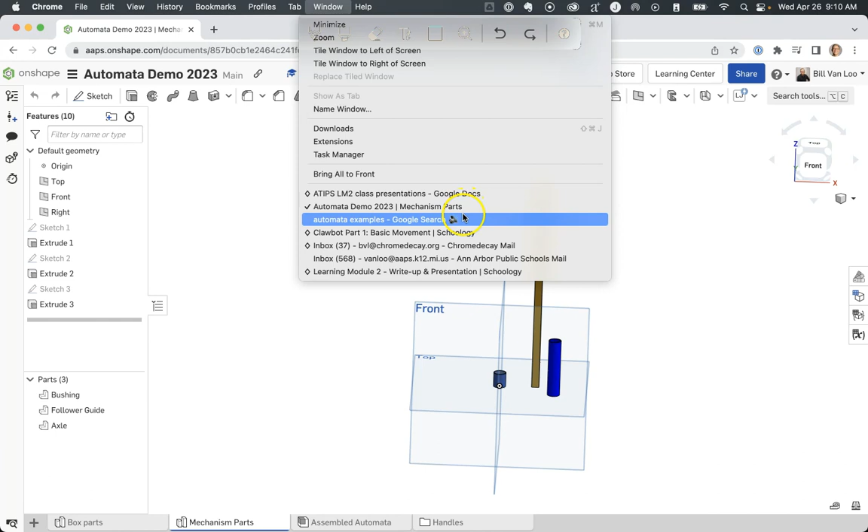So far we have our box parts and we have our mechanism parts. There are a few more files that we need to actually go in and model, so let me show you what those look like. The additional drawing files are in the mechanism parts drawing files folder. Up until now we'd had just these first four, now we're adding an additional part called follower with point edge, and eccentric cam.

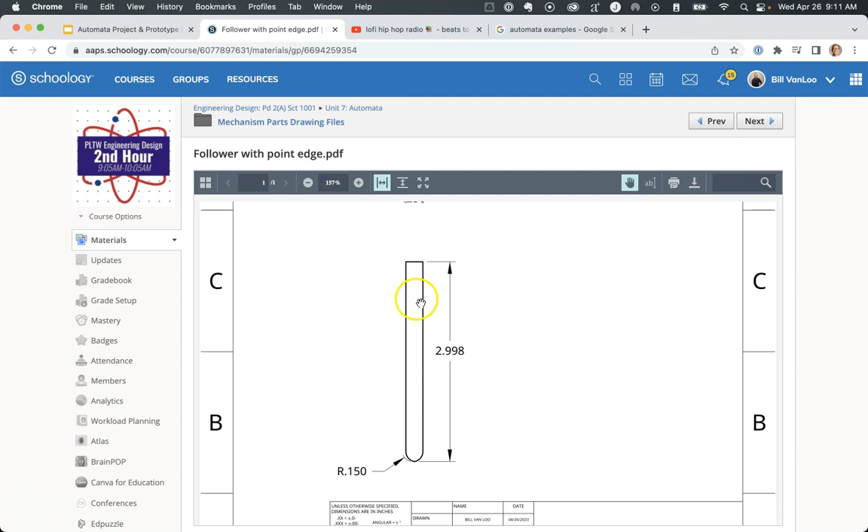Let's start with the follower with point edge. The drawing file for this shows that this is basically very similar to the axle. It is a 0.25 by 0.25 square prism. The important difference here is that this has a radius applied to one end, and the reason that's important is that we're going to need that radius for the follower to smoothly be able to ride along on the cam.

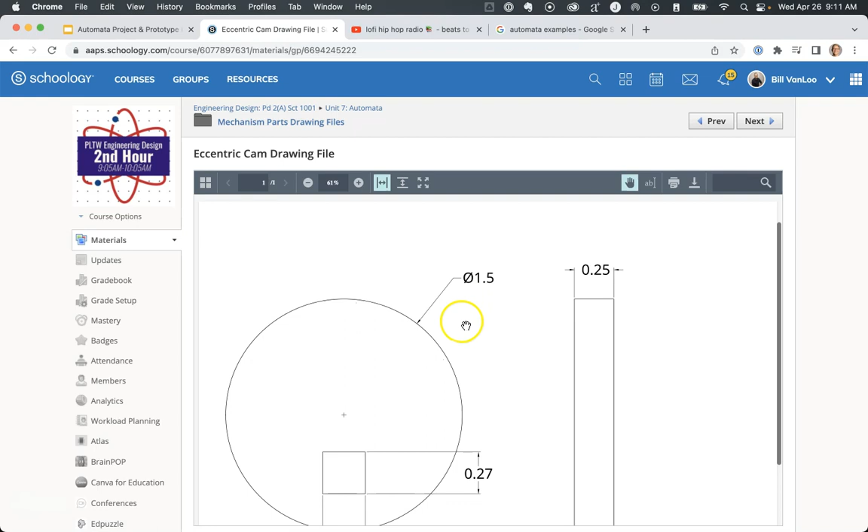So let's talk about the cam and what it looks like. There are lots of different kinds of cams. For this prototype, we're going to just use this one type called an eccentric cam, which basically means it has an off-center hole. So it's just a circle, this one is of diameter 1.5 inches, and it has a 0.27 by 0.27 square hole. There's a little tolerance there so it can slide onto the square axle pretty easily. And you can see that it's just 0.25 inches in depth.

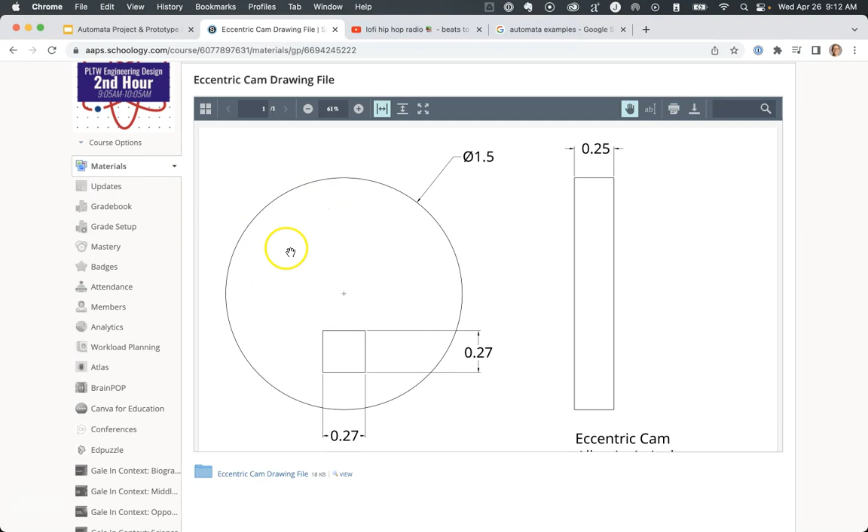So the first thing you'll need to do is model those two parts. You'll need to model the follower with point edge, and you'll need to model the eccentric cam. Once you have those things modeled, then we need to go through and actually start assembling things.

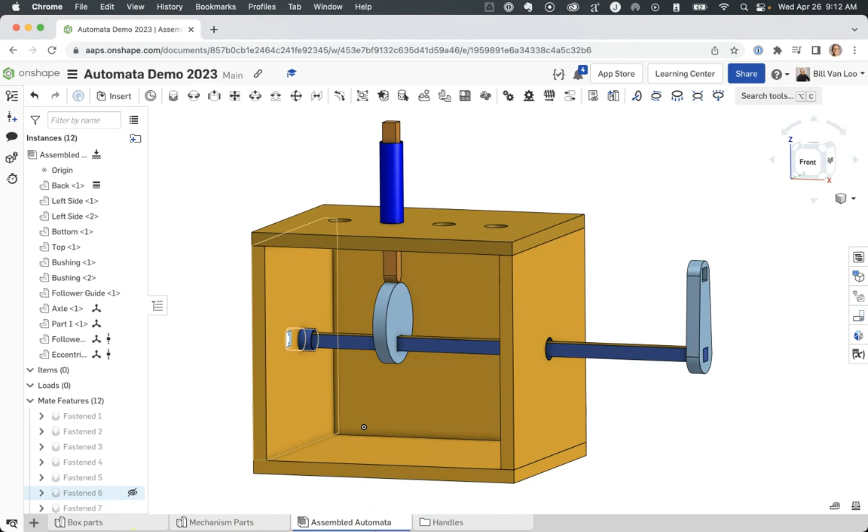I showed you an example of what the finished assembly looks like. What I want to do now is take a minute to just build that up for you so you can see what that looks like. So what I'm going to do is pause the video and get this to a good starting point. What I have at this point is just the automata prototype's enclosure, just the box in other words.

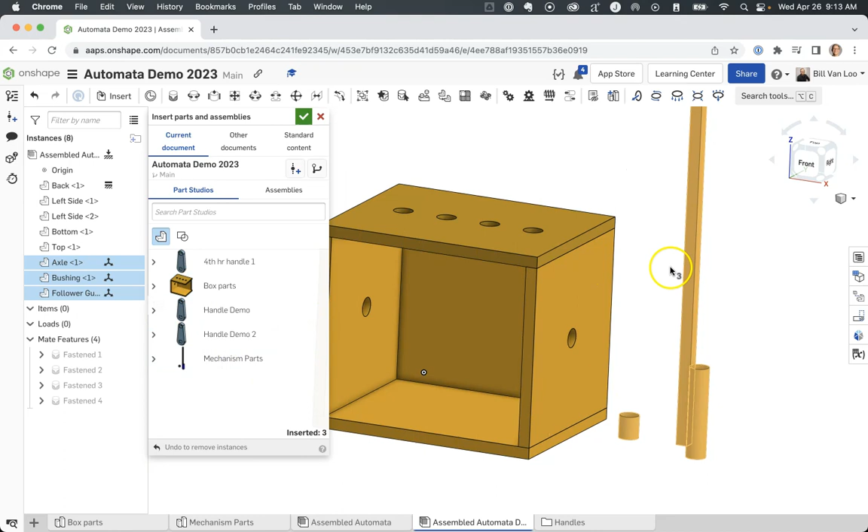What I need to do is insert those additional parts and then start putting in the correct mate types that go along with those. So I'm going to click Insert. Now in mine, I chose to model the mechanism parts in a separate file, or a separate part studio, so I'm going to click and just insert all three of those things.

I've got my axle, I've got my follower guide, and I've got one bushing. I'm going to need two bushings, which are those little sections of straw that we use in real life. So I'm going to go back to Insert, go back to my mechanism parts, and insert a second bushing, and click OK.

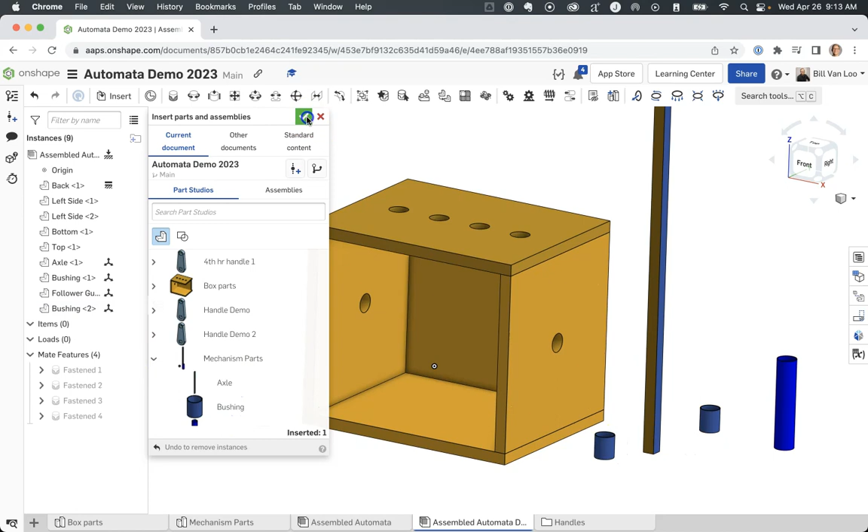I did go through and change the appearance for these things to make the follower guide and the bushings a little easier to see. You don't have to do that, but I think it's kind of a nice touch.

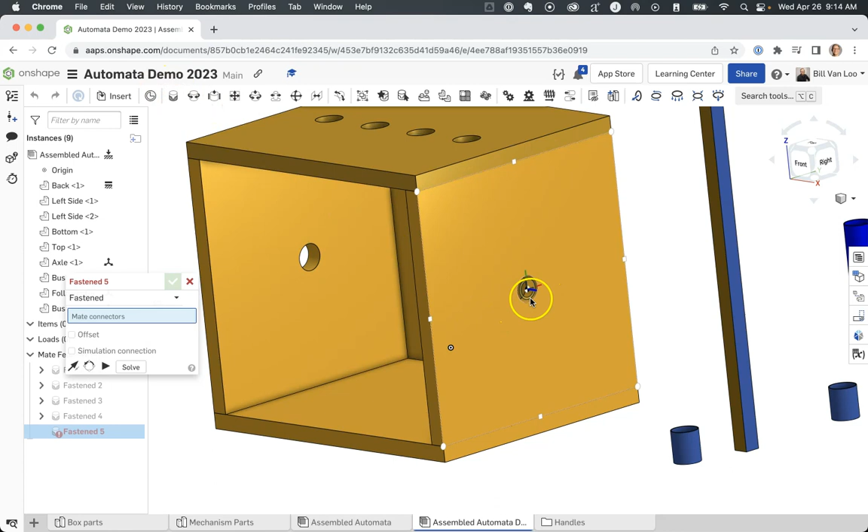So the first thing I need to do is actually assemble the bushing into that circular hole. For that, I'm just going to use a fasten mate. I'm going to find the mate connector for that hole, then orbit around and find the mate connector for that bushing. You can choose whether you want the bushing to be sticking into the enclosure so it's nice and flush at the end, or you could choose to have it offset some. I'm just going to go ahead and click OK, and so now my bushing is set in there.

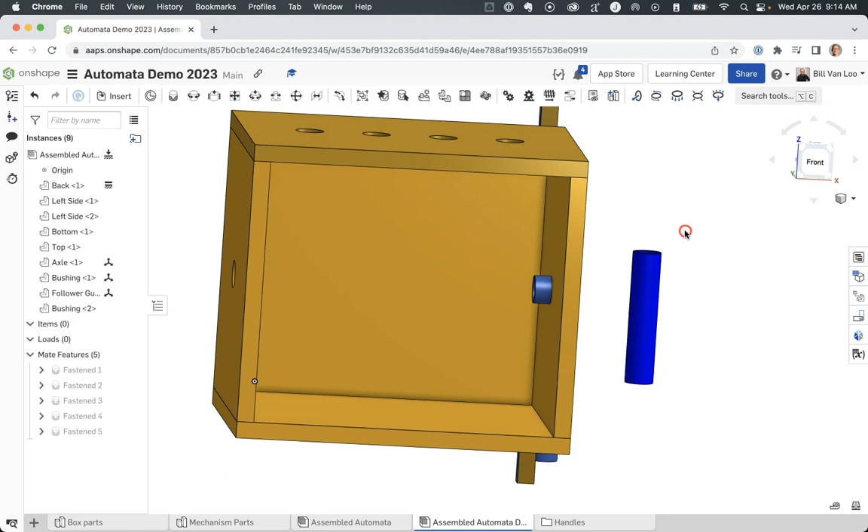I'm going to do the same thing over here. So I'm going to go and find the center mate connector of this, find the center mate connector of this, and let that get assembled there. So that all looks good. That's great to start with.

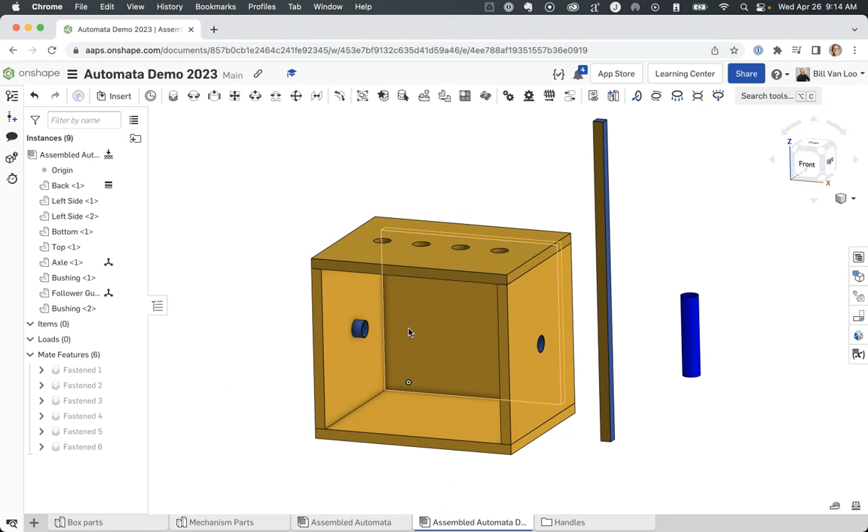The next thing I'm going to do, you could do this in a few different orders, is I'd like this axle to go through the bushing and be able to rotate or spin freely. In Onshape we can use a revolute mate for this. I'm going to choose the mate connector at the end of this axle, and the mate connector for that bushing, and click the check. It's a little hard to grab, but you can see if I grab and rotate the axle, it spins inside there.

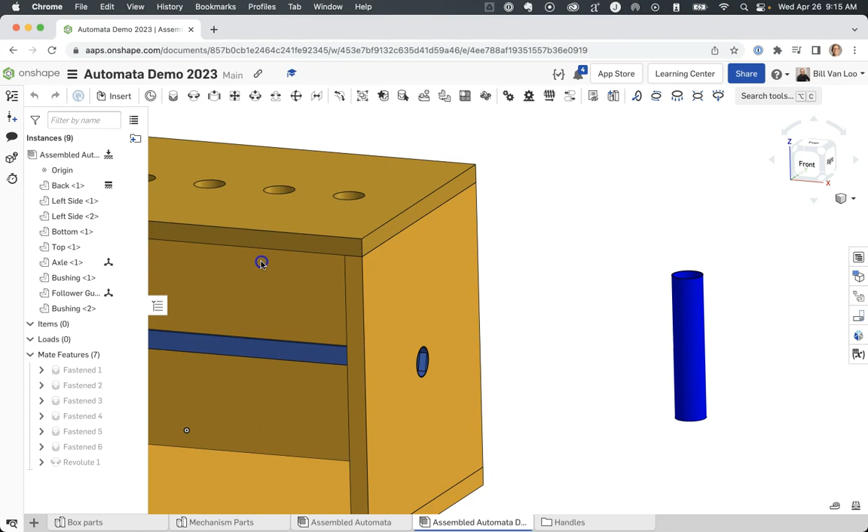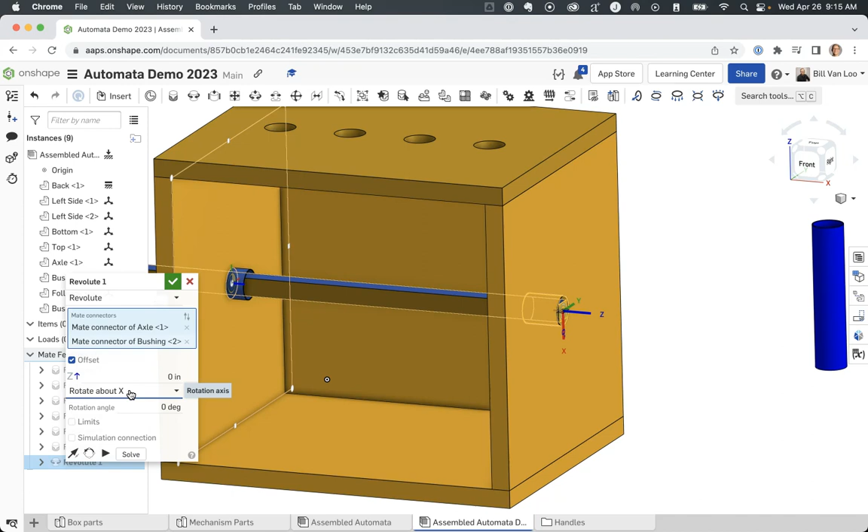One thing that's a bit of a pain with Onshape is that if I were to edit that revolute joint, I can't slide this thing over using offsets because the only choices for that type of mate connector are rotate. I don't have the ability to move it over and translate it sideways. So instead of mating it to this one, I'd like the crank handle to be on this side. Let me get rid of that revolute.

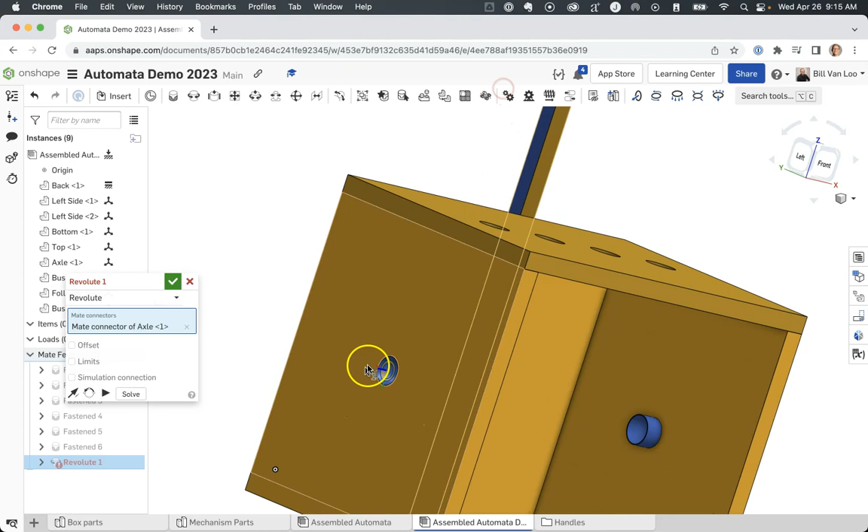I think I'm going to choose the other side bushing instead so that it ends up right here. Let's flip that around so it goes the other way. Now I've got this long axle sticking through there, and that all looks good.

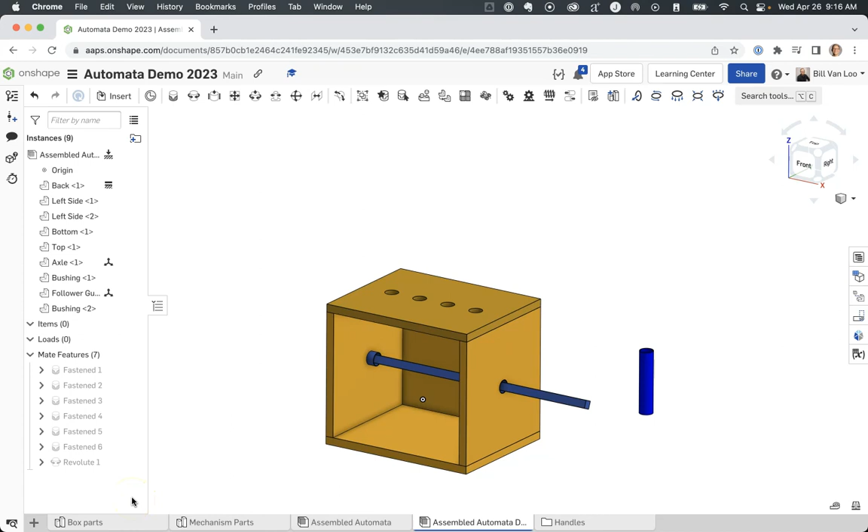Next, I'm going to go ahead and insert the cam that I've modeled elsewhere, along with the follower with follower guide.

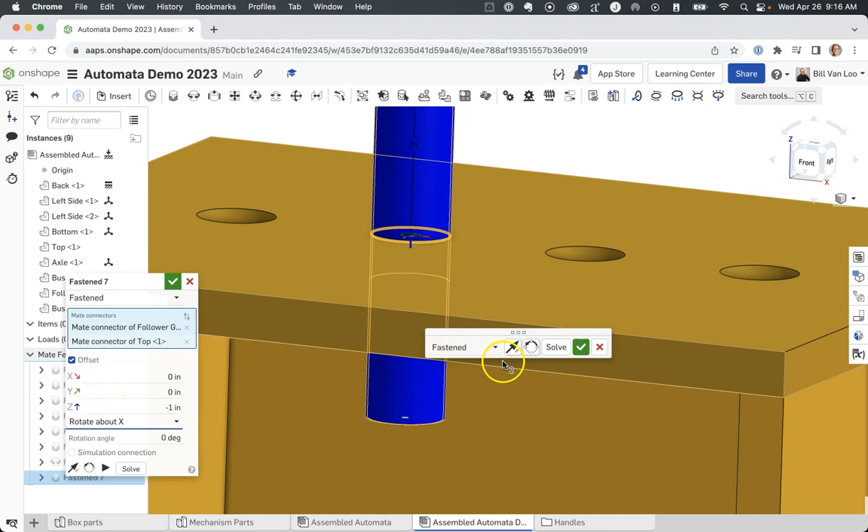Before I do that, I need to put in my follower guide. Same kind of thing: I'll grab the mate connector here, and choose this mate connector here. Because this is a fasten mate, I can choose to offset this some. It looks like I need to offset that in the Z direction by about -1 inch or so, so it's sticking halfway through there.

That looks good. Now I need to go through and insert those additional parts that I've made. I modeled those in a different part studio, but I can still insert them. If you chose to model those in a different document or part studio, you can still definitely go through and get those. One thing I need is the handle.

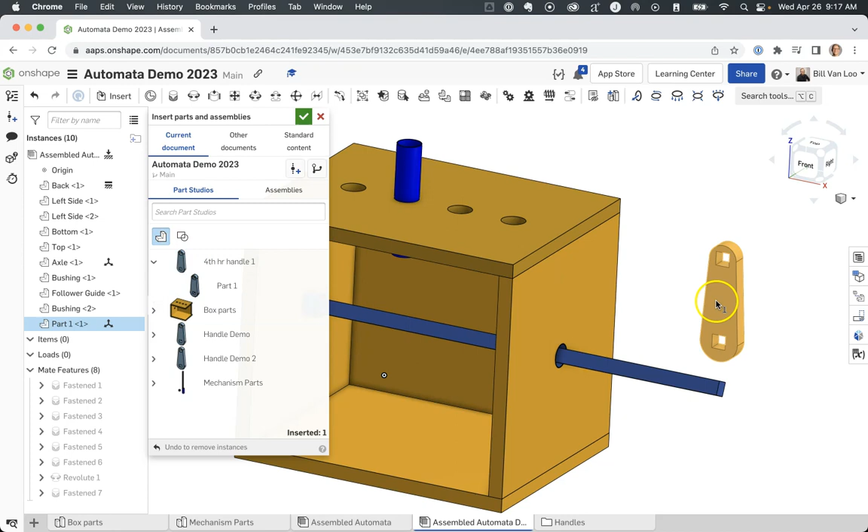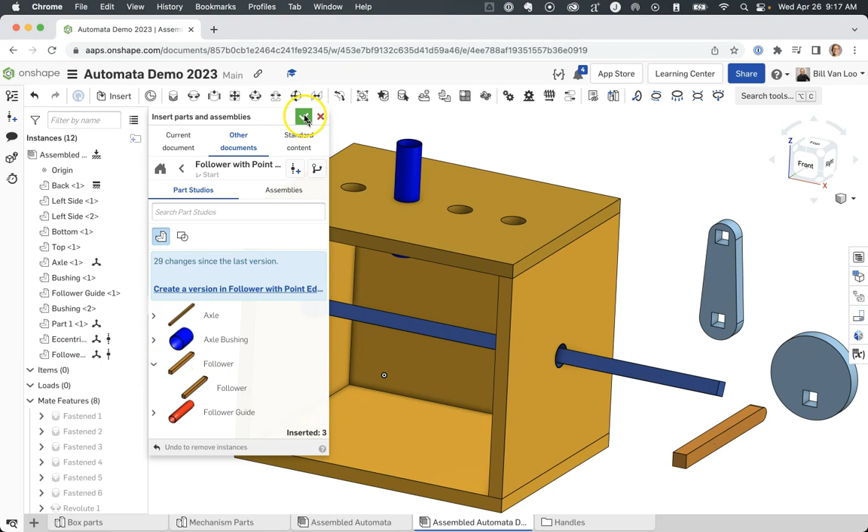So here's my handle. Then I need to find those additional things I made: the eccentric cam I modeled elsewhere, and the follower with point edge I modeled elsewhere. Here's my follower that I made. So I've got those parts. I'm going to go ahead and start with inserting and assembling this follower with point edge.

What we need to do is think about what kind of motion I need for the follower in the follower guide. What I need is for that thing to be able to slide up and down, which tells me which type of mate I need. In Onshape, I just need a slider mate.

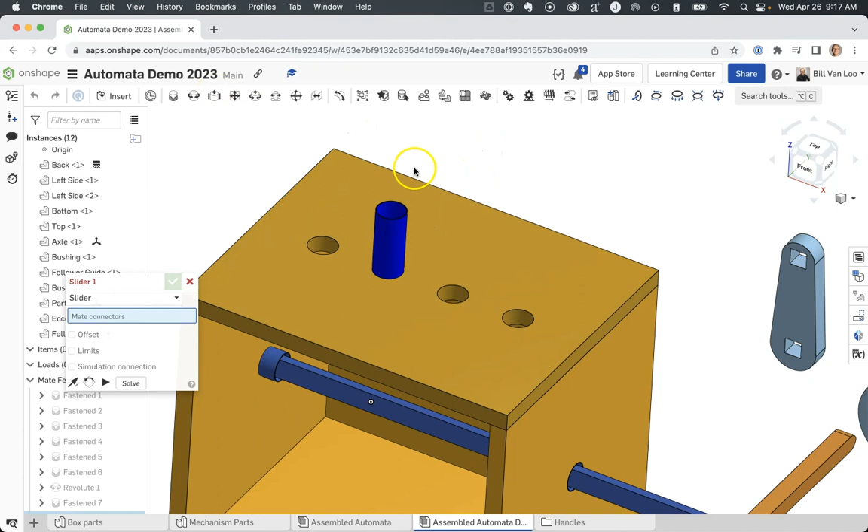Very similar to how we did our fasten mates, I'm going to find the middle of this, come around and find the square end of my follower guide, and insert that in there. Now that put my point edge at the top. I don't want that, so I'm going to flip direction so the rounded edge shows up there.

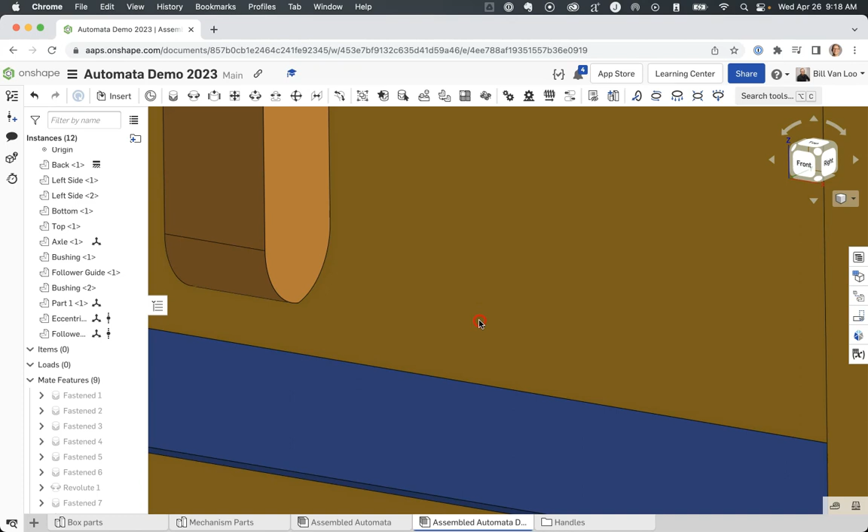One really important thing: I need to make sure that point edge is going in this orientation. In other words, if you looked at it from the right, you would see the radius of that thing. That's going to be important because of how it interacts with the cam in just a second. Let me slide this back up out of the way some. You notice all I can do is slide this up and down, I can't move it side to side.

The last piece I'm going to do for right now is assemble my cam onto the axle. For that, I want the cam to turn whenever the axle is turned, so I need a fasten mate for that.

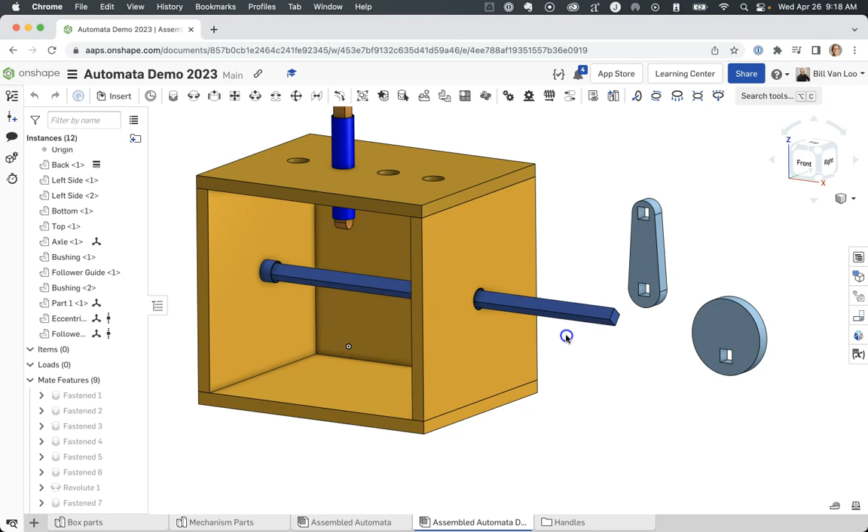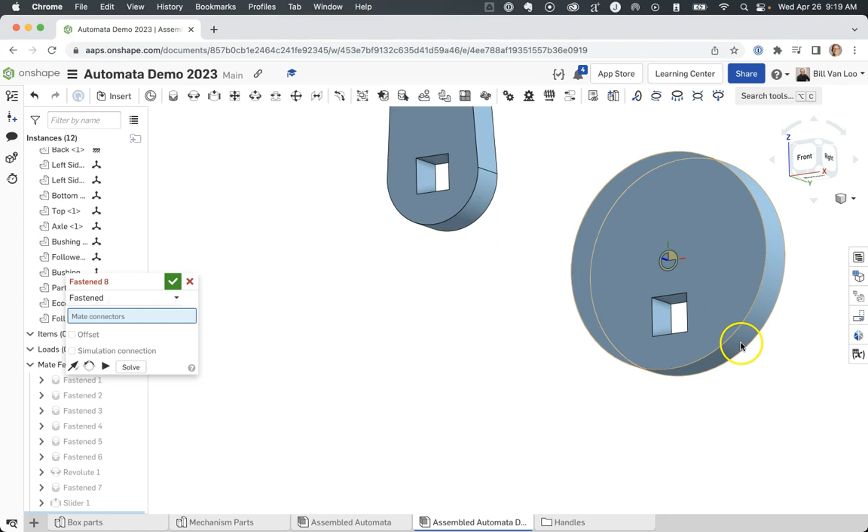I'm going to go ahead and grab myself a fasten mate connector. I'm going to choose the mate connector on the end here. Actually, I'm not, this part is a little tricky because the cam has a square hole. Oftentimes it won't show you the mate connector that's in the empty square area that's missing. So what I'm going to do is choose the mate connector that's on the side here, and on the end of the axle here.

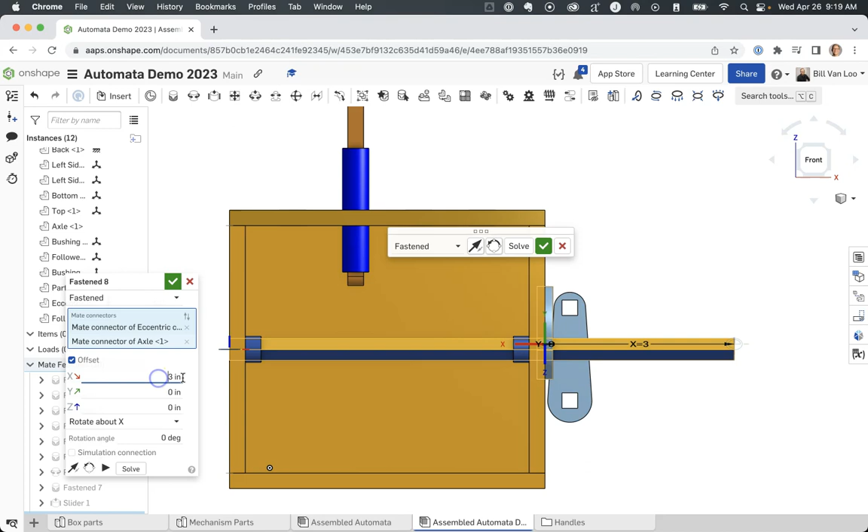Then I'm just going to use an offset. I'll look at that from my front view. I can see right here that I need to offset it in the X direction, so let's go ahead and offset that. Let's see if 3 inches is correct. Maybe I need to go a little further, let's try more like 6 inches. What I want to do is basically get that so it is right underneath my follower. That looks great, I can click the green check.

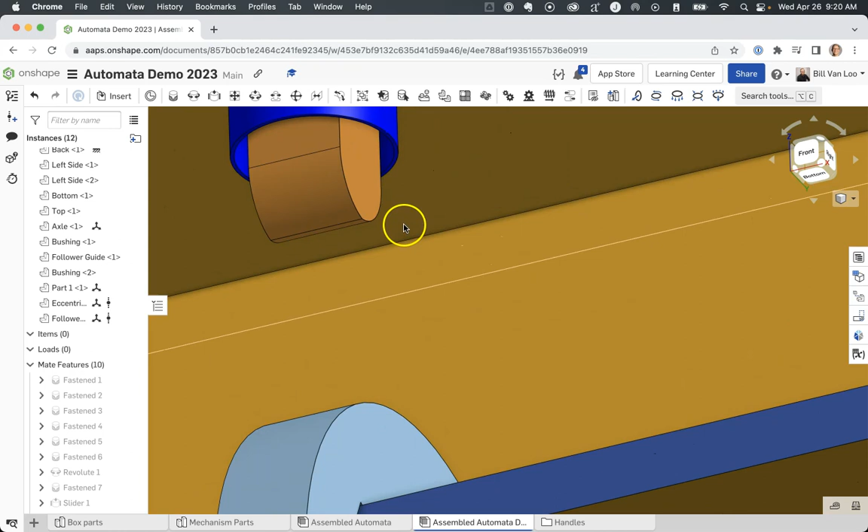Now, when I rotate this axle, you're going to see that the cam moves along with it, but it's not yet interacting with that follower. To get the follower to actually ride along with it, we have to add one more type of mate, and that is called a tangent mate. We want the edge of this follower guide to ride along on the cam, so specifically we're going to choose this little edge right here. We're going to say that we want the round face of this cam and this edge to be tangent to one another. So I'm going to click on the green check.

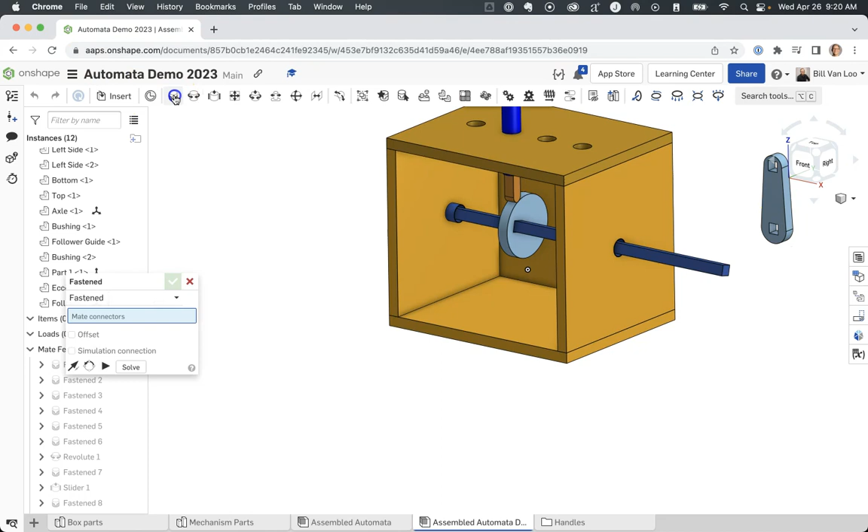Just for simplicity's sake, to make it easier to do the animation, I'm going to go ahead and add the handle, just because it gives a nicer place to grab onto stuff. Again, I'm going to choose the mate connector that's on the inside face there, and the mate connector that's on the end there, and I can offset this by a little bit in the other direction to move that handle in some. Maybe I want to inset that just a little bit.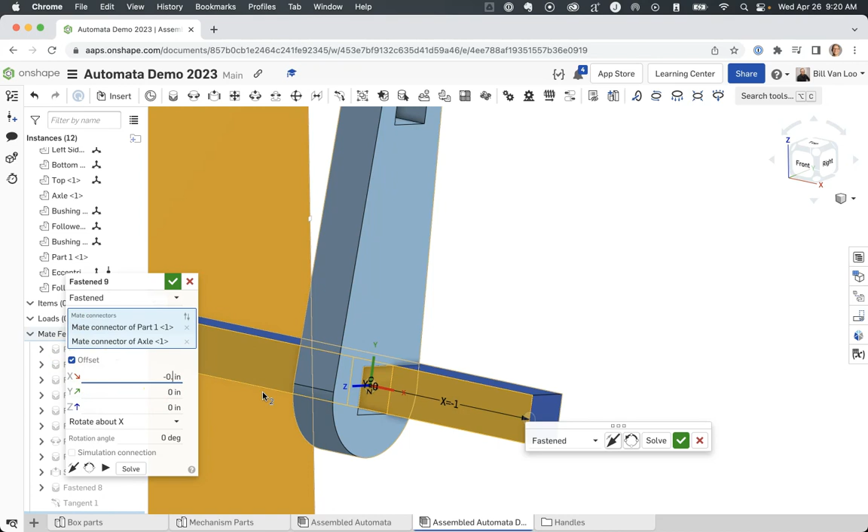That seems fine. That's a little wonky. Let me go back and edit that fasten mate for a second. What did I do there? I need to flip that. Look at that, there it is.

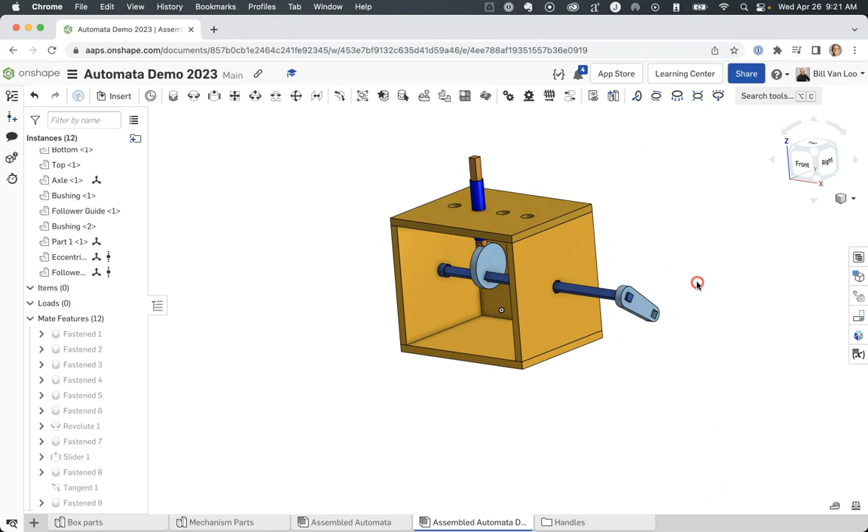All right, so now I can grab that handle, and that's a little easier. Let's get this back to a place where we can actually see this. So I'm going to go ahead and grab my handle, and what you're noticing now is because I have those mates in there, I've got a fasten mate between here and here, so when I turn the handle, it turns the axle. I've got a fasten mate between the axle and the cam, so when I turn the axle, it turns the cam, and now I have this tangent mate between the cam and the follower, which means that this edge should always remain tangent, in other words should always follow the path of that circular cam.

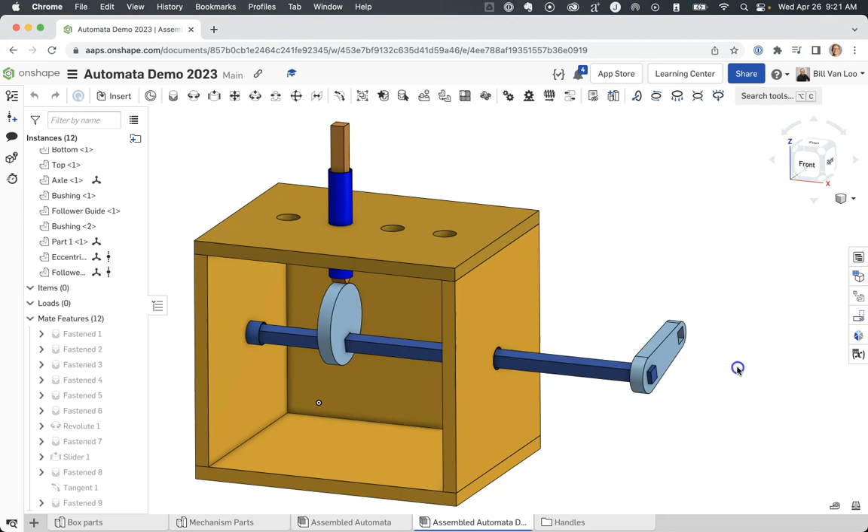And because that cam is eccentric, meaning the hole is off center, the follower is going to rise and fall as I move that around. And actually, if I look at this from the front, what's really nice is when the cam is at the lowest point, this follower is still sticking up out of the guide. So that looks really good right there. So by the time you're done modeling and assembling those parts, this is what it should look like.

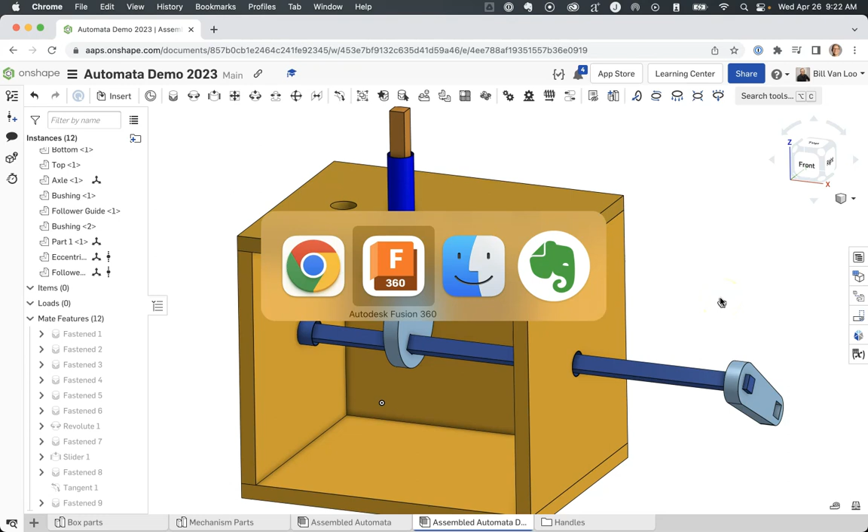Now, if you're choosing to do this in Fusion, it's going to look very similar, it's going to work very similar. Mine looks a little different because I went ahead and applied some materials to this, so I made these different colors, for example, by applying different materials. You're going to see the same kind of behavior though. I've got my eccentric cam in there, and when I turn the handle, we see the follower rising up and down.

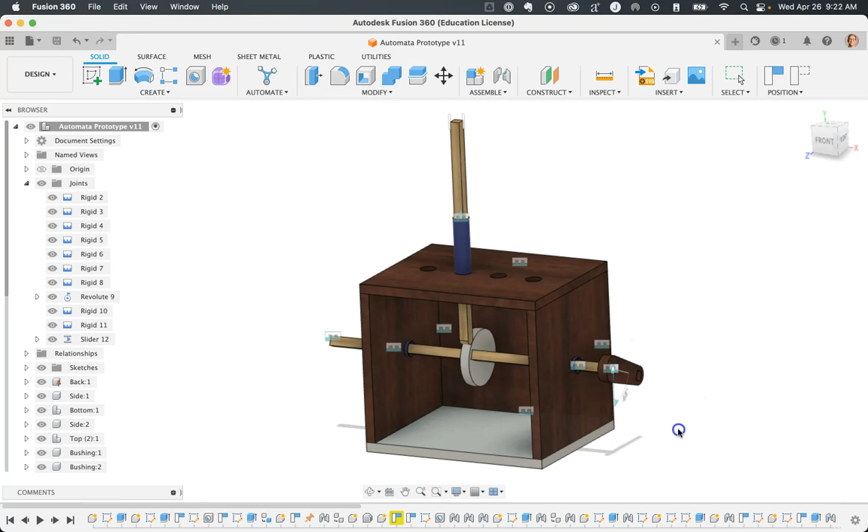So in Fusion, these are rigid joints instead of fasten joints. It's still a revolute joint and still a slider. The only thing that's really different there is just the sort of appearance, and this tangent joint here is the same kind of thing as in Onshape.